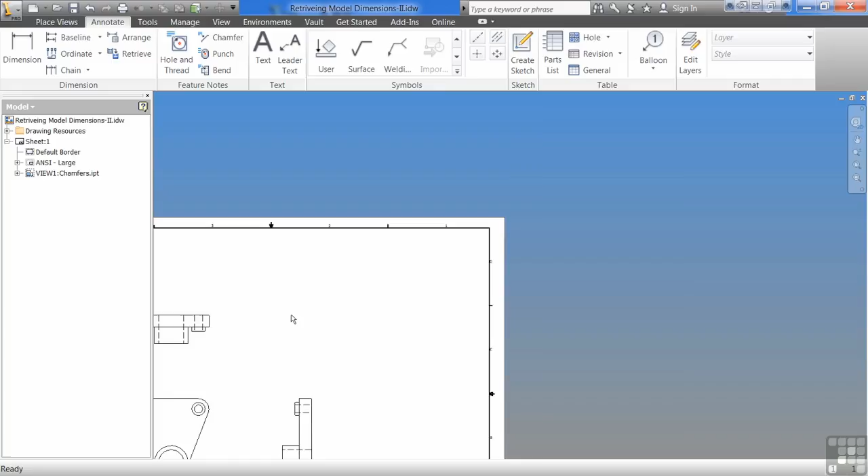So to start with, we're going to come up to the Annotate tab, and you can open up any of the drawings we've been working on. It doesn't really matter which one you use. And we're going to come up here to the top, and we're going to say Revision Table.

First thing it asks you is, do you want to do the entire drawing, or do you just want to do the active sheet? You could have 6 or 7 sheets in here, and you could have the revision table only on the first sheet, or you can have it on each active sheet. I like to have it on each sheet because each sheet could be different.

You also have the ability to determine, are your revisions going to be alpha or numeric? I definitely like alpha. My revisions are always ABC. I don't know why, but I've always done that. Numeric to me, I guess, gets too much into the part number.

And I want to update the property on revision number edit. In other words, in your iProperties, you have a revision number, and it's set at version A to start with. And then if I need to add another row in the table, it'll automatically update the revision number in the iProperties. We'll go look at that in just a second.

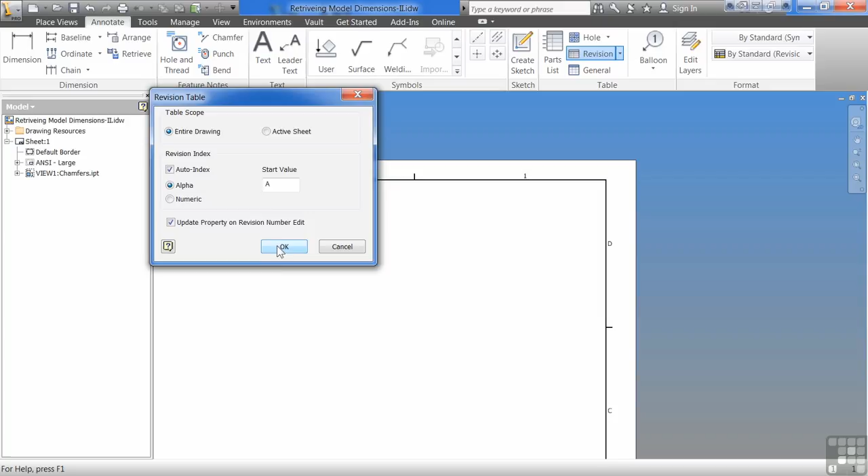I hit OK. And in the last exercise, we set up our style, so we should have style Andy. Looks like we're good to go.

And whenever you get close to a line, you'll notice that it kind of pops to it, snaps to it almost. And if you get next to a corner, it'll snap to it as well. Now, I always do my revision A as the original, and I don't really have to worry about it.

It's good to go. Once I need to add another row, I just double click on it, and I come in here, and I could say Insert Row. Now, I have Insert Revisions, and then Insert Row. If I say Insert Row, this is still the original, it's just row 2. This is our Insert Row, and this is Remove Row.

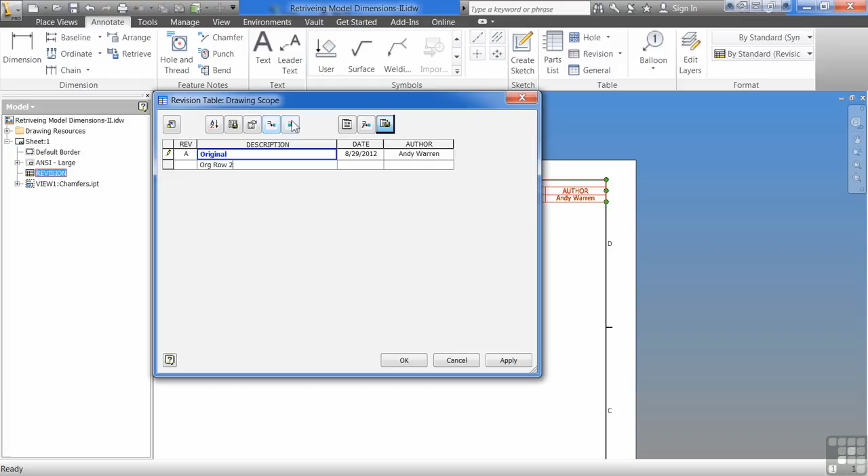If I come over to this icon that says Add Revision Rows, you'll notice it changes the revision to Revision B. That's the reason I checked it. It automatically changed it to Revision B for me, and I can save it.

I actually can sort by different revision options. I can export this list out. I can look at the table layout as far as how it's set up, and just go from the bottom up or top down, the name of it.

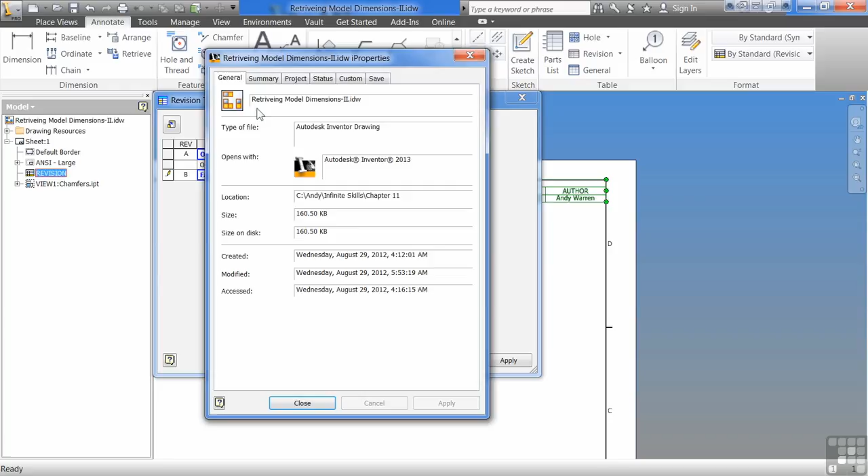And then I can come over here and look at iProperties, so I can attach iProperties to it. And then I can update the property on revision number edit. Now that's just a toggle, that's on or off. iProperties would actually take me out to the iProperties, so I can see that revision B now is the active revision. So it's automatically updated that.

If I come in here and add another row, and I hit iProperties, you'll notice that it's now revision C, because I keep changing it. Every time you add a row, it changes it. You don't have to type text in there, but I highly encourage you, if you're making a revision, then that means you're changing something. So make a good description there.

I can choose if I want to add additional columns at this point, and it will not override my style. It'll just be on this particular drawing. Maybe I need to have engineering approval and management approval in this particular set or something like that. So we can go through and just have a revision special to this drawing. Hit OK. So now I have my revision table in there.

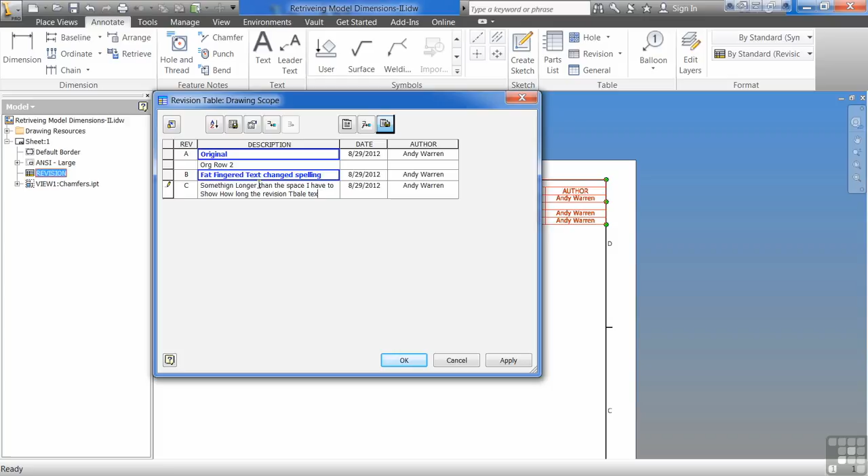If I go into the description column and I have a very long description, if I get really long-winded there, you can see that it will actually take and do word wrap. But let's say I didn't want a word wrap because it's getting into my part.

What I can do is I can spread this out a little bit, make that longer. The longer I make it, the more room it's going to have. It will push this other stuff off my page. I can just grab my table, drag it back over, and it'll snap back in my corner.

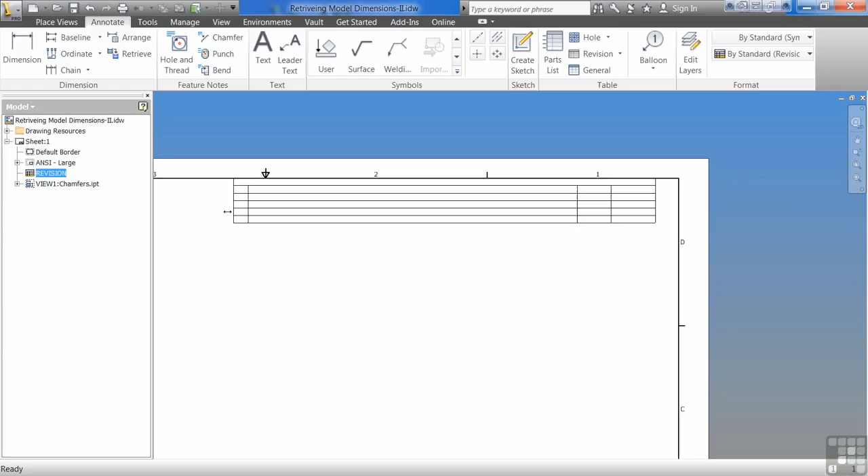I wanted to make my name a little bit shorter. If you want to make something shorter, you go from right to left. If you want to make something longer, you go from left to right. So I can push in there as tight as I want. I'm just trying to cram as much space in there as I can.

So, that's just a little too tight. I can spread that back out, spread that out. Or I can say, you know what? I don't care to have 2 rows of text, I just don't want to have 3.

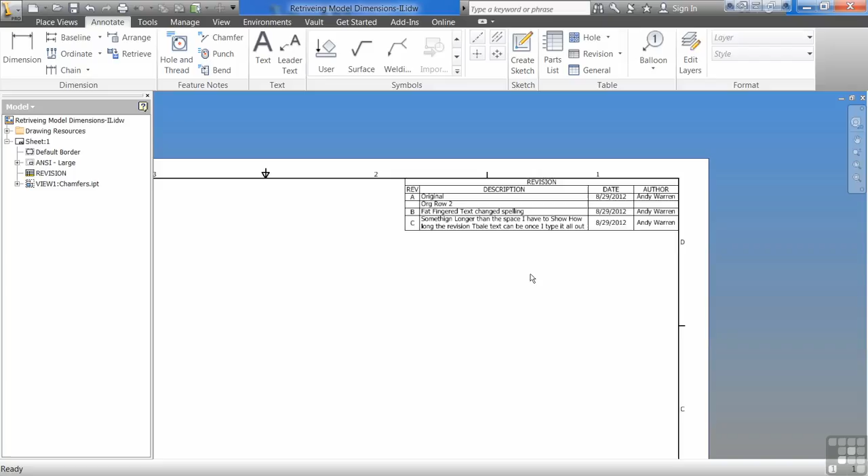So you can play with it and you can stretch it back and forth and you can force it to be the revision table that you want it to be. You can actually add these headers and descriptions and change the way they look, make them bold. But for the most part, this is a pretty standard revision table.

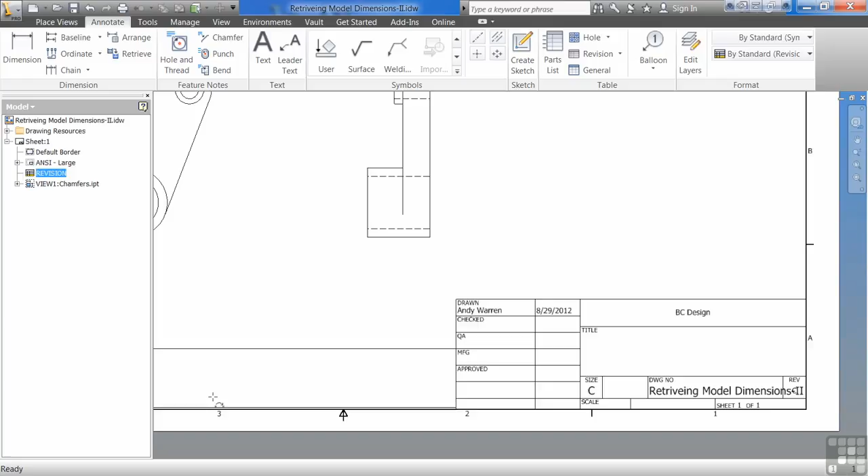If I do drag it down, I can snap it down here, or I can snap it over here beside it. The best way to move it is not to grab the lines like I just did there. Is to actually grab the text. For whatever reason, I find if I grab the text, it's the easiest way to move it.

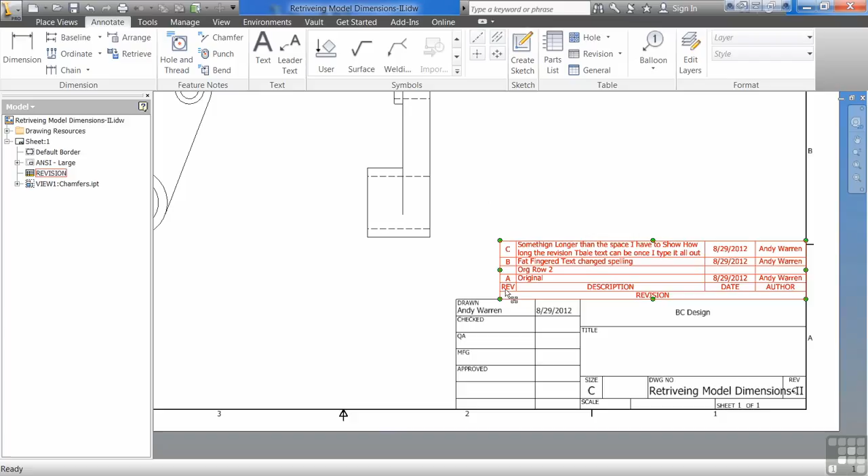If I move it down here and I say, just on this particular one, I can come in here and look at my actual table layout, and I could change it so it goes the other way. Okay. So basically now revisions at the bottom, it works its way up, so the one at the top is now the newest.

It's however you want it to go, however you're used to. Try to make it look like your office drawing standards. If your office really doesn't have any drawing standards, try to make it look like everybody else's. The easiest way to do it. You can play with it some, figure out how to get it to look the most usable for you. Try to see how you can do it. And then the next thing we'll look at is actually adding revision tags that associate back to this revision table.